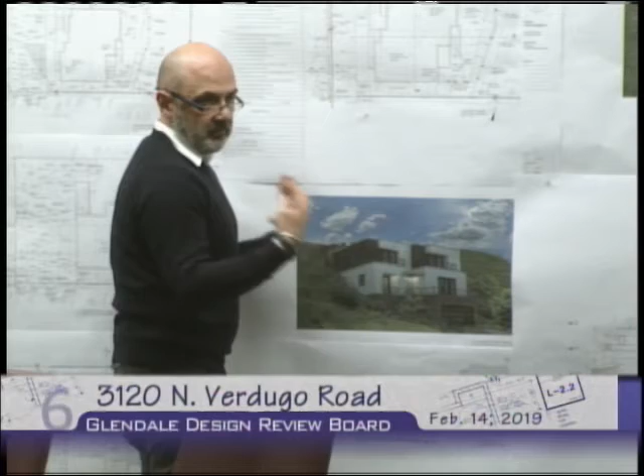This is the only thing that is kind of interesting - pulling this back so it carves into a nice softer opening there, or creating this so it wraps around with some windows or something there. It just feels a little bit more like a commercial office building look, and brings some residential flavor to this, and maybe on the other side, when you have all these solid walls here, maybe some openings or something.

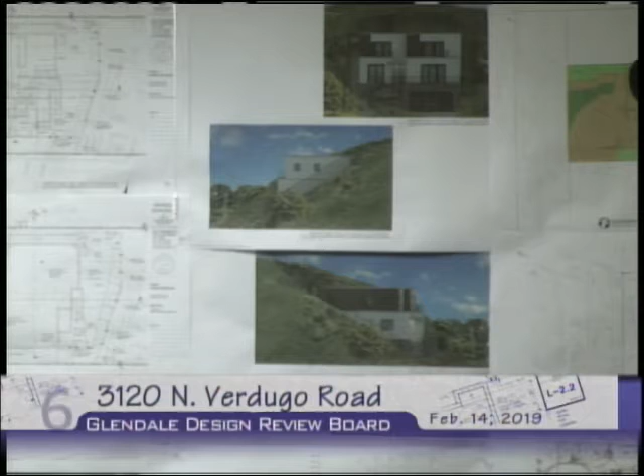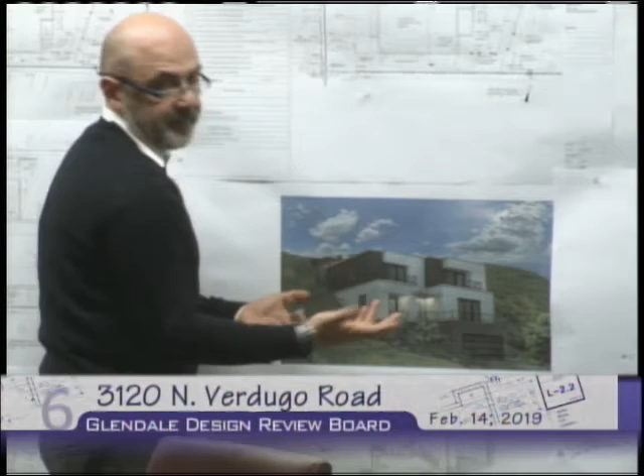I don't know, somehow this three-story building needs to soften up a little bit, and I don't know if it's just materials or these boxes that are coming out, this thing is pushed in. Maybe the window comes out forward, or we could soften that corner with a recessed section, panels that wrap the corner treated with the same kind of wood siding or something like that. I think a little less stucco sticking out of the hill would help, more of a residential flavor with some softer materials, and something that enhances the horizontality maybe, especially at that second, middle level. Yeah, probably in that sense.

It is going to be sticking out. It's literally in front where the garage is on the adjacent property, and it's a split building. The one in the upper, it's a two-level building, and it's visible, with the sides going right next to the garage.

I don't even have a good idea of the context of the adjacent, like that 6-foot section that's going to be left between the garage and the other garage, and how that's actually going to be dealt with. There's a lot of those kinds of questions, and hopefully by softening the building it will be a better view. I think staff started touching on that with their conditions.

I think it's a good direction. I think it needs to be taken a lot further, just material-wise, but I think it just needs to really feel like a house rather than more of a commercial building.

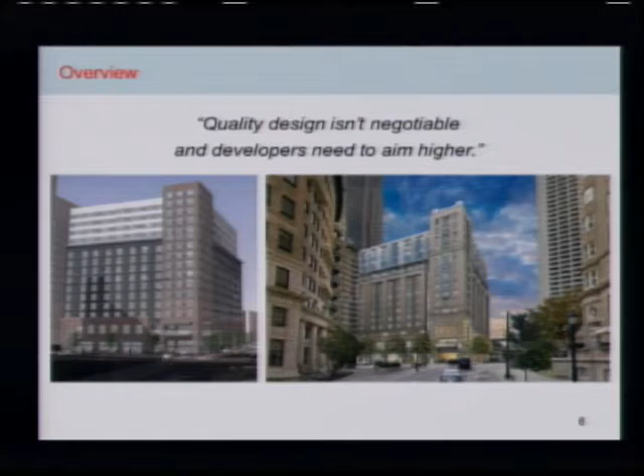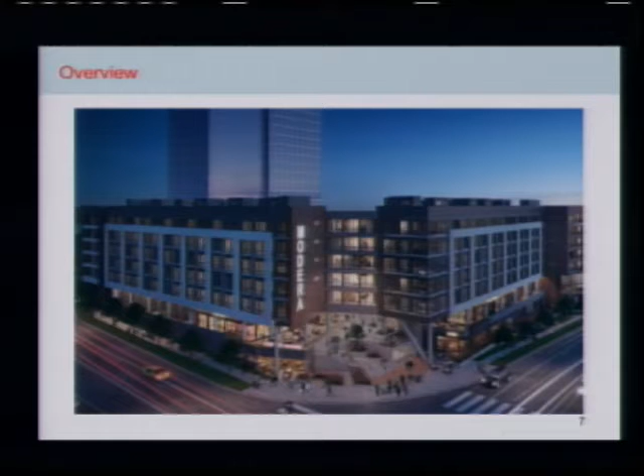Another project that we have looked at is the Modera Prominence, a very similar name to the Modera here in Glendale. Same name, same developer, similar density, similar size, similar requirements. Yet this project, located in Buckhead of Atlanta, was able to obtain public open space at that corner, and if you go to the other corner, same thing. They were able to achieve large open public space.

The reason we bring this up is because as we looked around at other cities, this same developer has two more projects in this city by the same name, and they were able to achieve high rises, elegant, graceful, tall buildings along with open space. So what we realized is that many of these other cities are asking and requiring improved standards and design quality and open space, and they're obtaining it.

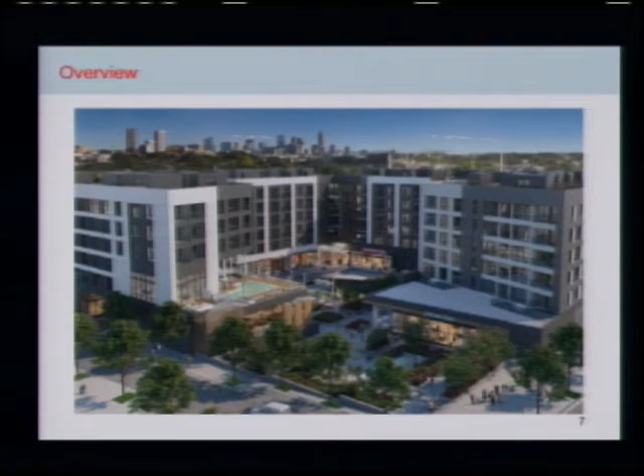That's the approach we took to the updates to the DSP, to be intentional and deliberate. We understood what the community wanted to see, what council wanted to see, and we explicitly state that as part of the downtown specific plan.

As we go through some of these next slides, you'll see that we've really blown up these chapters, we've added a lot. This is not to create a long, difficult process for a designer or developer. We're not trying to create identical results in every single project. What we're really trying to do is bring consistency to our applicants, designers, and developers, so they know what to expect when they come in.

A lot of the feedback we've heard is that designers may receive input that isn't necessarily clear, and that's not necessarily the fault of those giving the feedback. It's because our standards don't explicitly state what it is that we want. It's also meant to assist staff and council.

As we move past the DSP, if we can apply these standards to other neighborhoods, other districts, other types of design, to our boards, commissions, and council, then when they're reviewing projects, they'll have measurable criteria to evaluate them against.

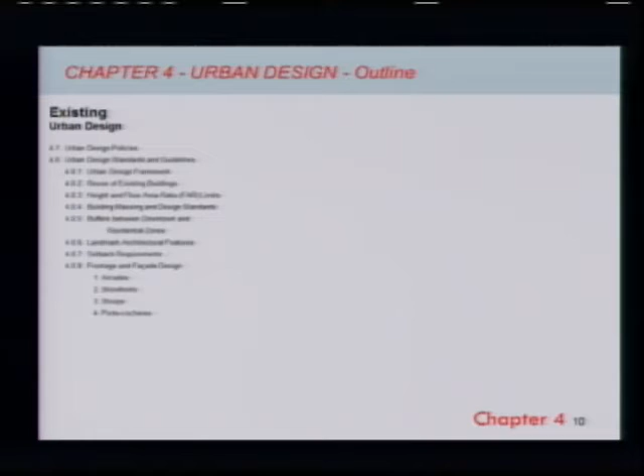The way this is structured, it begins with 4.1 site planning, dealing with large-scale elements that influence the overall form. That includes existing uses on sites, the overall massing envelope from height and FAR to setbacks and open space. It really shapes how that building can be organized on the site.

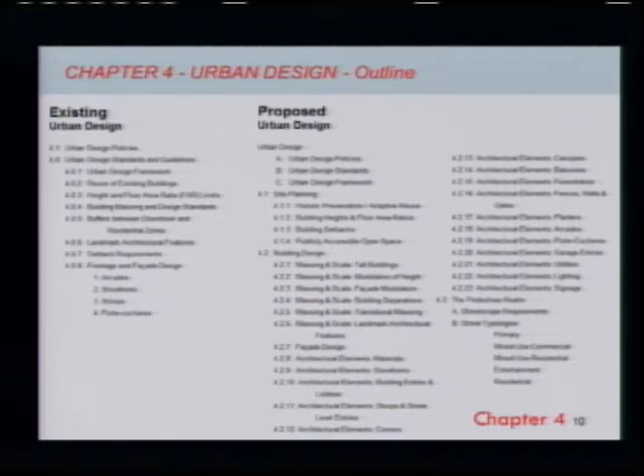As we move through this, it drills down into detail, starting with overall roof lines and modulation, eventually getting to information regarding signage and utilities and how that's located, to create a cohesive design that fosters a good pedestrian environment and public realm. This is the existing height and FAR chart in the DSP.

What we're proposing is to remove the height and stories requirement, primarily because the height of the buildings does not align with the number of stories required. In some cases we have a 185-foot tall height allowance, but only 12 stories can fit in. We all know that mostly in a residential building we're not going to see 14 to 16-foot floor-to-ceiling heights.

We did that because we wanted to create more flexibility to obtain open space and improve sidewalks. Towards the end of this, we'll run through a diagram on how that influences what happens at the public realm and how we can distribute that displaced development throughout the building.

We also looked at two areas to raise the height to 185 feet. Currently, it's kind of a Bermuda Triangle between about 85 feet and 100 to 200 feet, where developers just won't build. The return's just not there. You're switching construction types, changing materials, changing a lot of things, and until you can get that building tall enough, it doesn't make sense to build at that height. So we've actually recommended bringing that up to 185 feet, similar to the Broadway Center A area.

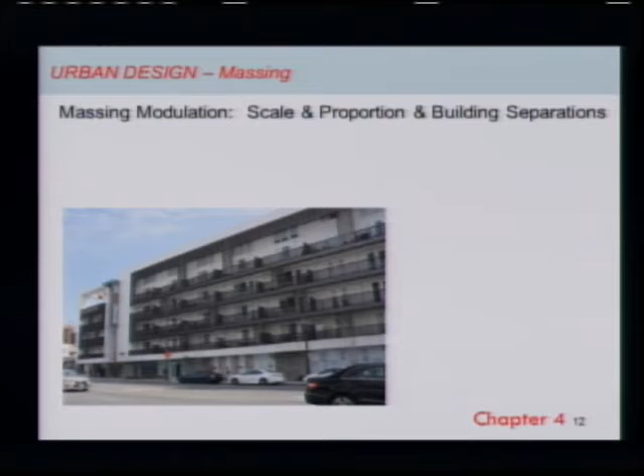So currently, this is one of the recent developments in downtown Glendale, and some of the critique we heard is, again, large, boxy buildings, a monotone material palette. It's missing the kind of nuance that creates an interesting skyline and a more engaging streetscape.

I think we all kind of know that this is something comfortable to the eye. This is a basic design principle, especially for mid-rises and high-rise buildings. Council responded very well to this.

What we came to understand from council and the community is that's one of the reasons everyone loves Brand—you have this constant change. Every 20, 30, 40 feet, the facades are changing, the buildings are changing. There's no reason we can't pursue those same principles with new development and new projects.

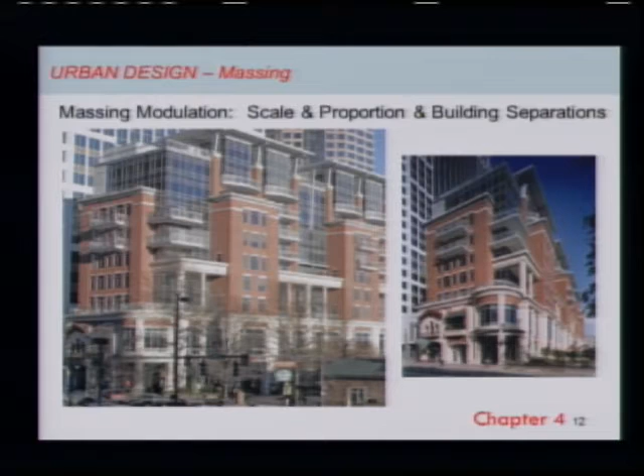So as we start at the top of the massing, we heard that the roof line height was lacking interest. You could see in that prior example the roof line was a pretty static datum line. A lot of projects follow that, the idea that we've given the city a haircut at 55 feet, and nothing really goes above that to create visual interest.

So what we've done as part of this is create some standards and requirements, and most importantly, some options. Again, we're not trying to engineer identical results, but we can create a series of options new projects can pursue to create more interest.

One option is that we require a minimum 10-foot change every 150 feet along any roof line facing a primary street or street frontage, so that we break up this massing and it feels like multiple buildings. Some of these buildings are 200-300 feet long, and we need to create a scale that relates to the human environment. You'll see how that translates to the facades as well.

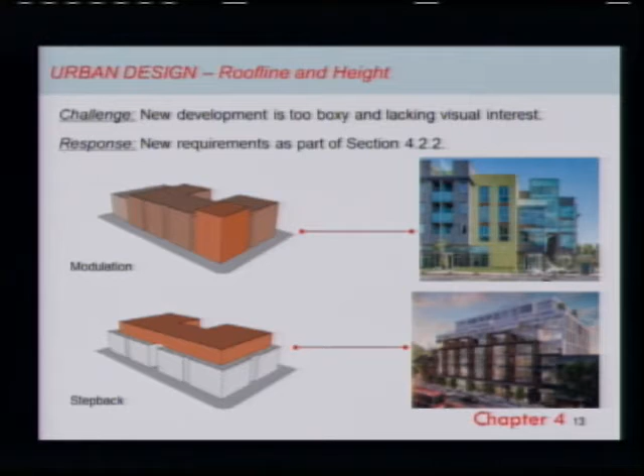Another option is to step the building back. We heard a lot of critique on Central that it was becoming a canyon, and that above a certain height we could have these floor plates step back so it lets that breathe, again relating to the human scale.

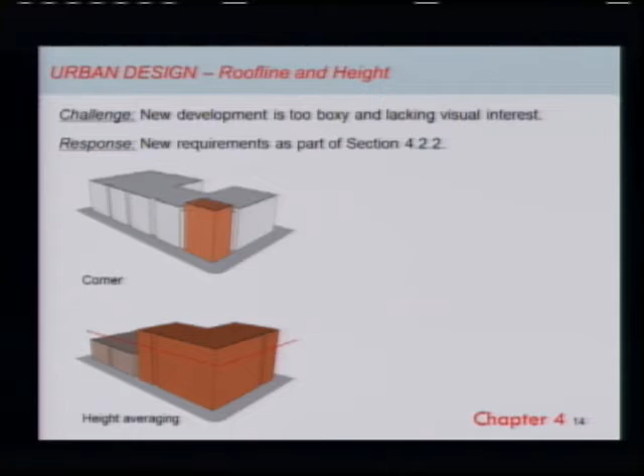Another option was a corner feature. We heard positive feedback from some newer buildings that incorporated this, and how it created a gateway and a sense of prominence to the building, but also variation in the roof line.

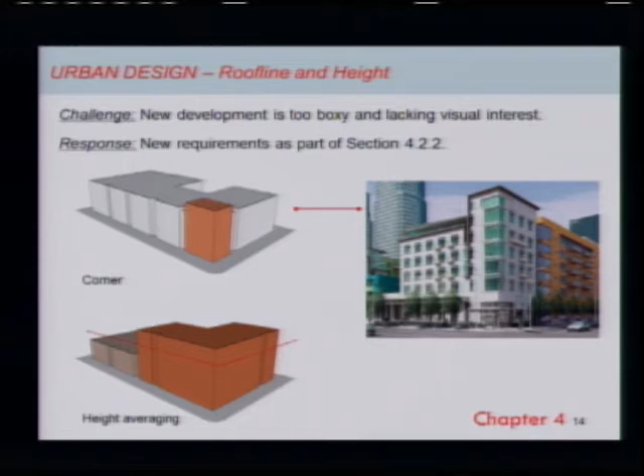And then the last is looking at height averaging. This may be most applicable in transition zones, where we would allow the displacement of some building mass closer to the street, away from the residential transition area, and allow that to exceed the maximum height, provided the entire massing averaged to the existing maximum height. This was, again, to create two distinct forms. It could assist in creating a better transition to the multifamily neighborhoods to the west and east, but also just create more variation in the skyline.

What we also looked at is how that affects the vertical, not just the horizontal roof line, but some of the facades that we have are long expanses of storefront glazing, aluminum storefront glazing, with little variation in the facade. So we're requiring major and minor modulations every 100 feet and 50 feet. Inside your document, it lists the specific depths and widths, the minimums we're looking for. But to follow that standard, we need that variation as one is moving down the street, that constant change, that visual interest as you move along.

So major every 100 and minor every 50 feet? Correct. And there are some other features we won't go through everything tonight because it's just so much information, you can see in the table of contents. But we have information regarding setbacks at the building adjacent zone on the street frontage and how that can align, so we're not creating situations too difficult to achieve, but ones that can align with other things we'd like to see as part of the streetscape or building design.

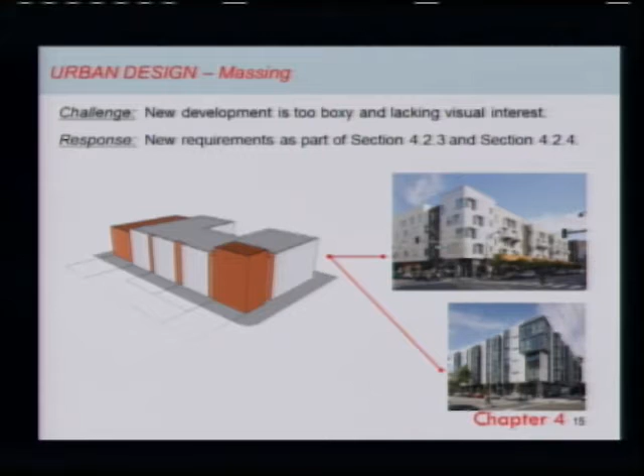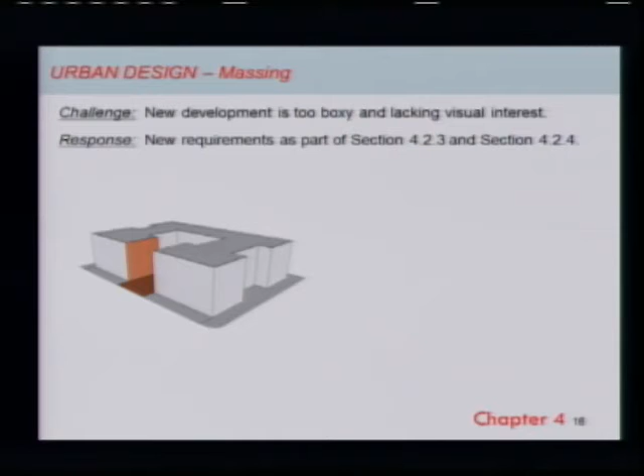And then building separation. As I mentioned before, some of these buildings span up to 300 feet along the blocks, and in many cases we do have a separation in the center, about 40 feet wide. The issue is that it never comes down to grade, and that same facade continues on for the full 300 feet. So it may look good from far away, but if you're a pedestrian, you're still walking along that same repetitive wall. So in this case, we want to see that separation brought down to grade, we want to see that building open up. It feels like two distinct buildings, and it gives you a reprieve from that constant repetition we see in those long blocks.

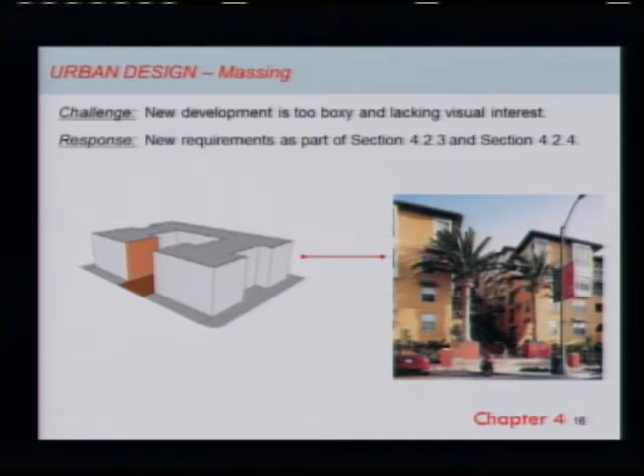Materials were a very major point to not only the community but council as well. There was a lot of discussion around the monotone color of materials, the fact that EIFS has been used as the predominant material. We know that's going to be used, we're in an earthquake zone, it's an efficient material to use, but it doesn't need to be the only material, it doesn't need to only be in one color, and it also doesn't need to be used at the street level.

Again, we're trying to create a human scale along the pedestrian realm, and these lower portions of the building, up to 20 feet, need to represent that. Rather than having these 8-foot by 4-foot long large panels, we want materials that actually speak to the human scale. That may be masonry, it could be wood, aluminum panels, or still concrete panels, provided they're scored appropriately. What we've asked for from applicants is not a list of specific materials to use, but rather to demonstrate to us that the material you are using can achieve a human scale.

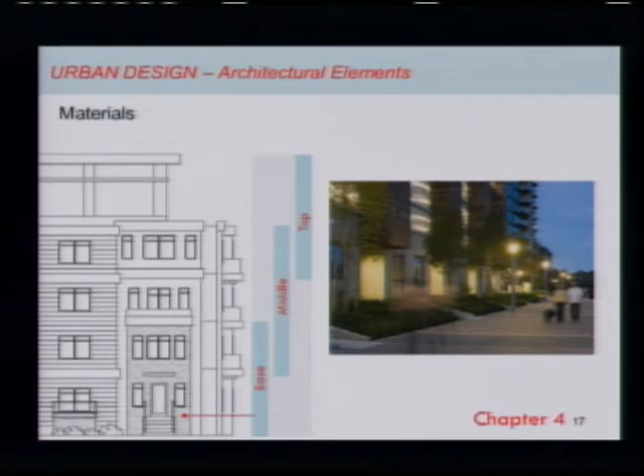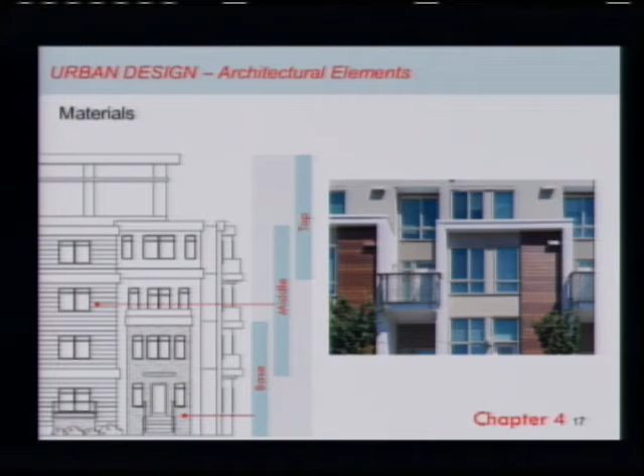As we move up the building, it's still keeping some of those human scale elements, but this is where it may be appropriate for large panels, where EIFS or metal panels may come into play. And even moving up further, are there opportunities to incorporate more glazing? Again, lightening that mass, especially in instances where we may have a building step back, so the building doesn't have that imposing nature.

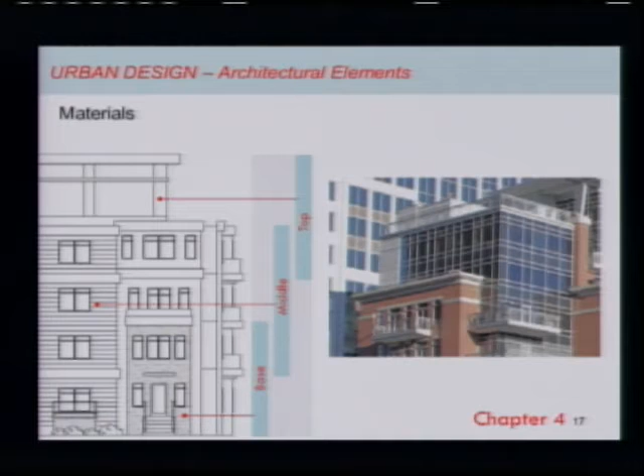Just because you have that picture up there, what are we doing? I think I've seen something in the packet where the overhangs, before you could overhang over the property line, that's gone? Correct, you will not be allowed to overhang over the property line. In fact, we'll cover it shortly, but we have expanded that entire pedestrian realm as well, and have created some requirements on where you can and can't overhang, essentially.

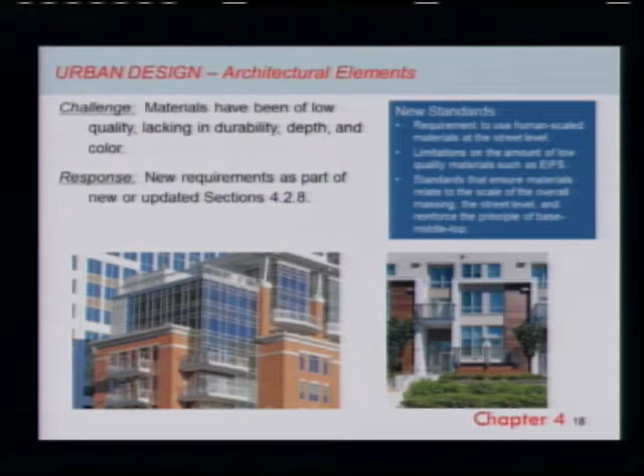So again, as I mentioned, we set a number of standards on what kind of materials should or could be used, really trying to increase the scale as you move up the building rather than at street level, so we're creating a friendly pedestrian environment, one a human can feel engaged in as they walk past. This also affects frontages. We've seen a lot of the same aluminum storefront frontages that are pretty standard, but the reason many people like variety is that as you walk down, you have different storefronts. Some swing out, some swing open, some are just wide open, and the activity spills out. The idea is that you can blend that private use with the public realm and it becomes more engaging, and we're trying to obtain that on other streets as well.

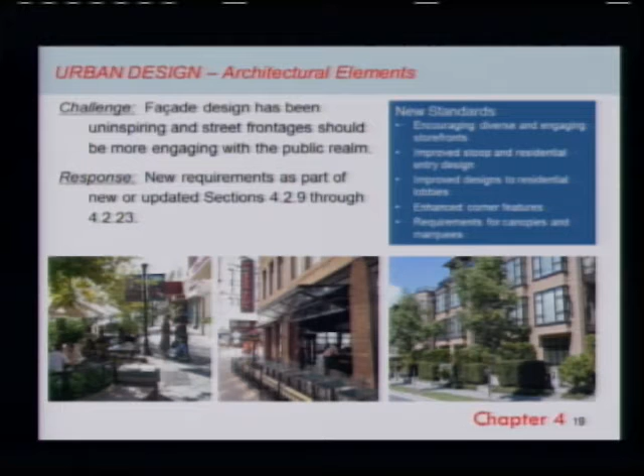So, if I may, I'm collecting all my thoughts. What I'm hearing is Brand is a great example, and that's what we want to do. But then at the other end, we're talking about setbacks and open spaces, and then about the massing and how it feels as you're driving down rather than the pedestrian. So what are we trying to achieve? I'm kind of lost in all these different thoughts being presented right now.

Because if we want to do like Brand, then we shouldn't have any setback, we shouldn't have any open space. It should be more pedestrian activity and scale to humans, just like Brand. Whereas if it goes higher, then yes, it's set back, so as you're driving down you feel much better rather than this monotone architecture. But then if we want to bring in open space, then it's not Brand, actually it's more the northern part of Brand. But that's more of an activity for the patrons of the building rather than pedestrians walking through, because people aren't going to walk into someone's property and enjoy it. We're not creating parks there. So that's what I'm trying to understand. Where are we going with all these different ideas?

So the focus is entirely on pedestrians. Even when we say canyon-like effect, that is how it feels in terms of the pedestrian - the fact that the buildings essentially begin to loom, and you have this continuous facade, this continuous datum line, so you never have a reprieve from feeling like you're in a canyon.

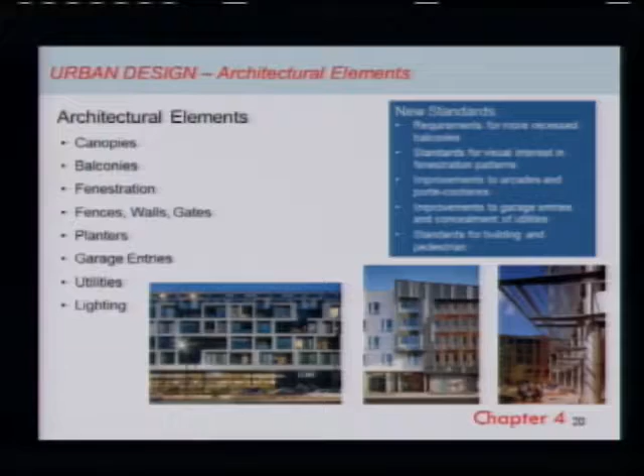Planters were another issue—in a lot of projects they planned landscaping at grade, then came back and added an above-grade planting box, often saying 'we didn't know our parking garage would be there,' even though we all know where that boundary is. Later this year we'll bring improvements to the submittal packets so we obtain this information early, so applicants can't say 'we didn't know.' We're fleshing that out early so we can be intentional and deliberate.

We're also locating garage entries on alleys wherever feasible to minimize pedestrian and car conflicts, and integrating utilities and lighting into the building so we don't have as many free-floating standpipes on the sidewalk. I'm going to turn this over to Velia now.

She's going to go through the public realm, which includes the sidewalk and open space requirements. Thank you.

As part of the urban design chapter overhaul, we really took a focus on the public realm, meaning the area between the curb and the building wall. This is in response to comments from City Council and the public about uninviting, imposing sidewalk experiences, especially along Central.

So there's a focus on extending that public realm, including wider sidewalks and parkways, requiring street trees at closer proximity, having lighting fixtures along street frontages at the pedestrian level, taking a look at pedestrian-oriented signage—whether projecting signs or wall signs—and re-examining intersections, crosswalk paving and striping, and expanded sidewalk bulbs.

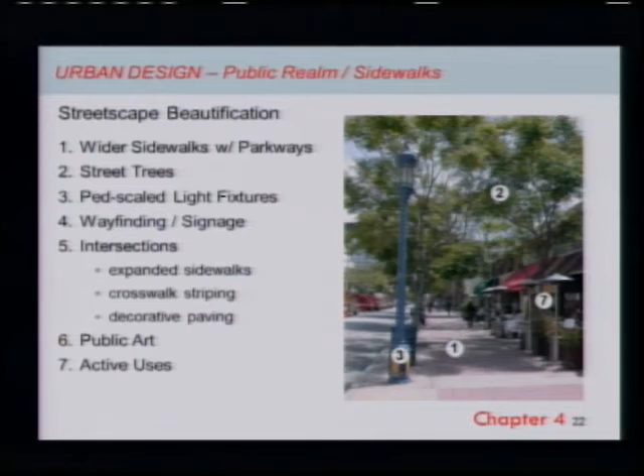We're also looking at public art, and how to incorporate it within the public realm so it's truly public art. We're examining uses along the pedestrian realm, such as activated uses like retail and outdoor restaurants, plus streetscape beautification like decorative paving and crosswalks.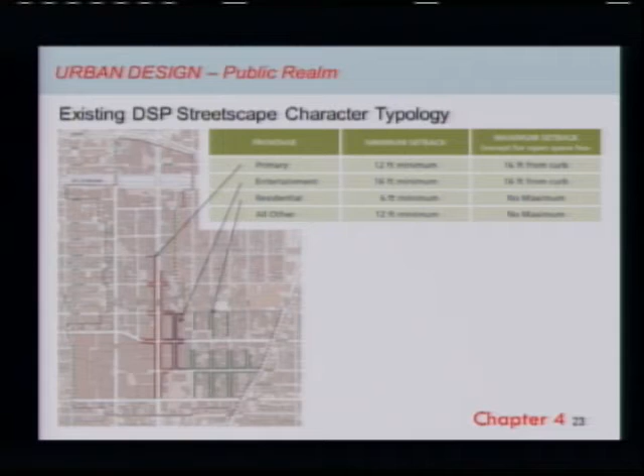Prior to that, it was our very first mixed-use district—commercial mixed-use and residential mixed-use back in the early 2000s. So those are the 3 streets called out in today's DSP, but it neglected to identify the rest of the streets. So we've introduced 2 additional street typologies.

One is mixed-use commercial streets, with its own development standards and criteria, primarily along Central Avenue and extending to parts of Colorado as well. The other is mixed-use residential streets—these connect Brand with Central Avenue as east-west connectors, and would be much more residentially oriented.

Not to say that you can't have commercial on these streets - those are permitted uses - but the primary emphasis would be more of residential stoops and lobbies and a more intimate type of scale and experience on those side streets.

So Vilya, we're talking about the same zones but with different guidelines, right? Yes and no. We don't have a map right now of the various districts. The districts themselves within the DSP, there are 11 of them, those are going to remain as is. So there are no changes to the actual districts in the downtown specific plan, but we've overlaid these street typologies on these districts. So the street typologies would essentially be standards and criteria for how do we address the street activity at that location.

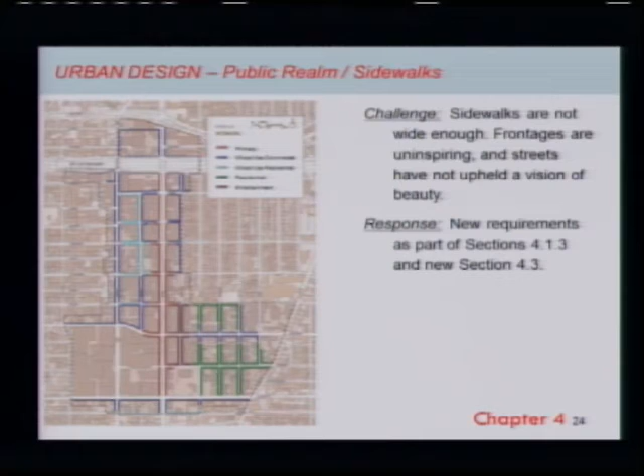The example before you on the screen would be essentially the distinctions between the different street typologies. So each street typology has its own total setback width - there's a wider setback for commercial mixed use, there's a narrower setback for the residential streets. But there is essentially a standard for the parkway width, the sidewalk, so there'd be wider sidewalks along commercial mixed use streets, and then also what's called the building adjacent zone.

In the building adjacent zone, you would be allowed to have either landscaping or, if applicable such as a commercial zone, street furniture, outdoor dining and seating for adjacent restaurant uses and whatnot. So each street, depending on its street typology, would have a different overall pedestrian realm and those corresponding guidelines.

So later on when we have the final version, you will identify the street and all the different setbacks that go with each one? These are actually in the preliminary draft that you received as part of your packet, so these streets are now identified within the draft. So these numbers are going to stay as proposed? These are the numbers that are currently proposed by staff, and again, if you have comments, this is the time and place to hear those comments.

It's an assumption made so that these projects are going to be broad, large development projects, correct? What happens to these smaller, narrower projects that have lots that are 50 feet wide and they want to develop this? How does that work?

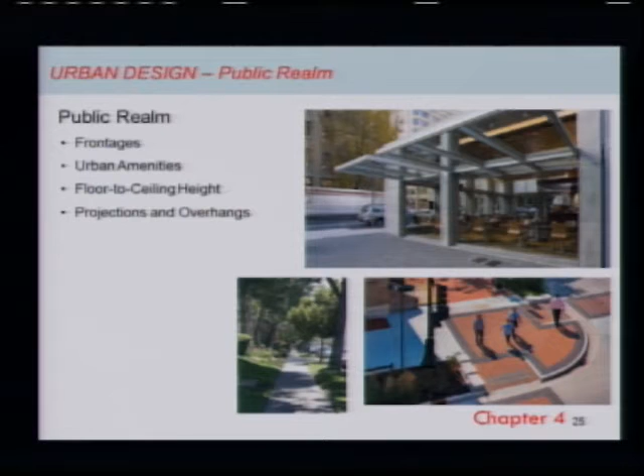We would also determine what the minimum and maximum floor to ceiling height would be, as well as projections and overhangs. And as noted, Chairman Bentley, there was a question: can the buildings project over the sidewalk? In this case, the downtown specific plan, the draft plan, prohibits any type of projections over the required setback or the new sidewalk level.

So by code right now, the building code is prohibiting it. Previously, projections were allowed and balconies were allowed to project into the public right of way over the front property line. That's no longer permitted by the Public Works or Building Department.

And in this case, based on the extended public right-of-way and sidewalk width, the building would have to come back from that as well. But you can project over the building adjacent zone. Following the mouse here, above 20 feet you'd be able to project out to the back of the sidewalk, essentially.

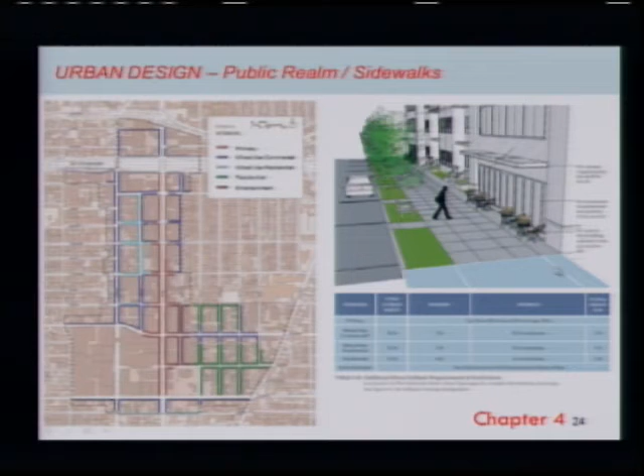So in terms of—which is a great segue to the open space chapter—this would be Chapter 5, which was revamped as well.

On the screen you see the outline of the existing Chapter 5, which covers open space, actually identified as parks and open space. So there was much more an emphasis on parks and the network of space.

We have not lost that network focus, but we've also introduced more stringent requirements for the actual publicly accessible open space on projects. This is in response to council direction and comments we've heard from the public as well. We've had these projects before where the publicly accessible open space—well, the area is there, but it's not really attractive, it's not usable, it's not substantial. So how do we address that?

Staff has presented an expanded Chapter 5, which has criteria for dimensions, accessibility, materials, landscaping, and hardscape. These are actually standardized criteria, whereas before there were a lot of guidelines in the DSP. This document really focuses on enforceable standards that give clarity to developers, give clarity to staff, and ultimately result in meaningful open space areas.

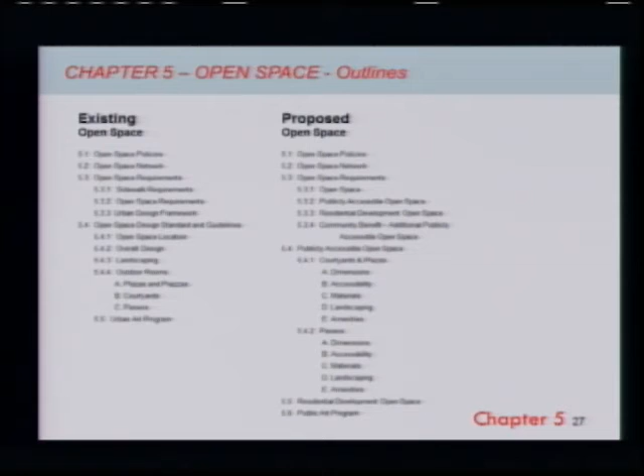So no longer will a 6-inch by 300 feet count. No, we will not be having any more 2 feet by 150 count as your publicly accessible open space. That's a good point, though—it has been used in the past. No longer.

The open space in this regard is going to have to be contiguous, in a meaningful, larger space that's actually adjacent to the public right-of-way. So you really do get a chance to feel this from the pedestrian level. It's not going to be elevated on another podium level that's not available visually or physically from the public. So there are criteria in Chapter 5 to address those.

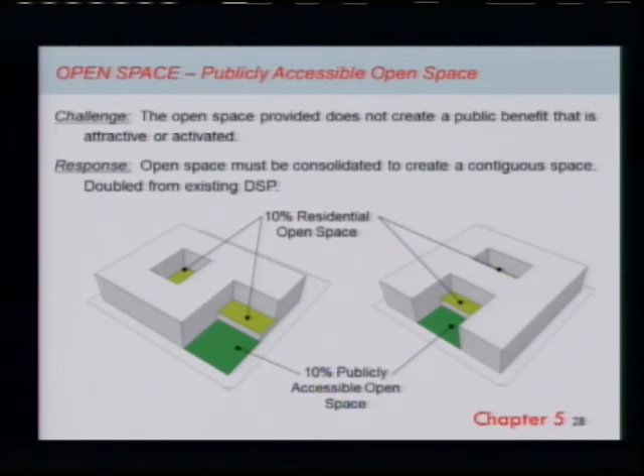There's also been an increase in the amount of publicly accessible open space. We've essentially doubled the required publicly accessible open space for most projects. Again, the requirement depends on which district you're located in and the size of your project—the larger the project, the more publicly accessible open space.

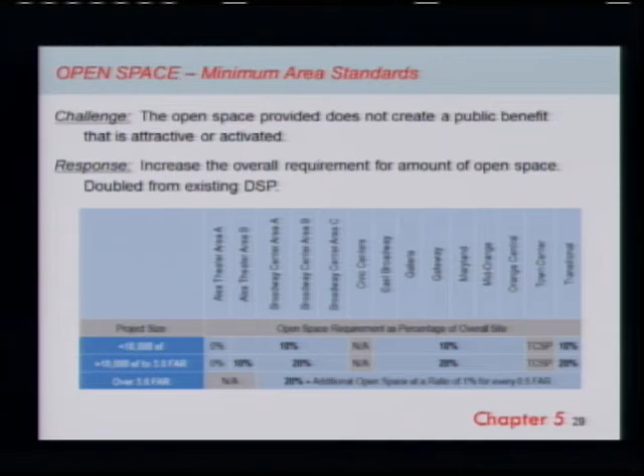So let me ask you a question, if I may. Let's say you have a property—7,500 square feet, 50 by 150 on Central or something like that, or 10,000 square feet, whatever it is—and 10% of that, assuming it's in that smaller portion, less than 10,000. So that means they have to provide 1,000 square feet of open space in that project? Is that what is being said?

If the street frontage width is 50 feet or less, no, they do not. If they're larger, yes. We did establish that criteria based on the width of the site facing the street frontage, because it doesn't make sense if it's an extremely narrow lot.

So if it's wider, say 100 by 100—correct, they would have to provide 1,000 square feet of open space along the street side, so people can use that as a setback, they can do whatever they want. So if they push the building back 10 feet, theoretically they get their 1,000 square feet that they need if it's a 10,000 square foot lot.

I think 10 foot is too small. I understand, I just don't want the public, and designers looking at this, to find a way, like previous projects, to manipulate the codes and bring something that just barely meets the code. It has to be a theoretical minimum, so it has to be substantial, usable space, correct?

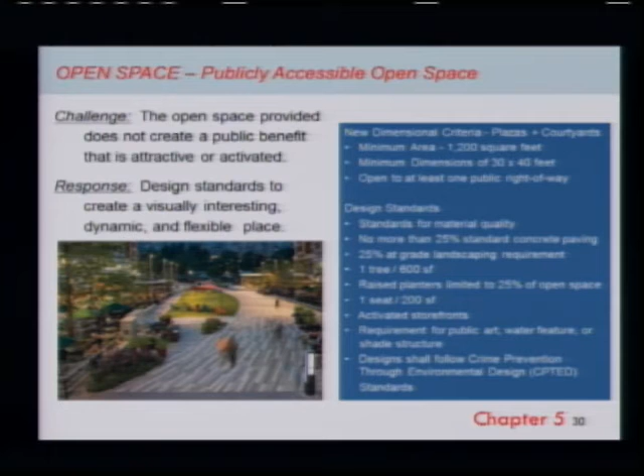So, if I may, just a comment, my thought as a board member. I appreciate the specific sizes as far as one tree for every 600, and 25% of open or landscape area, or 10% of open area.

But when we give a specific size of rectangular or square open space, aren't we kind of limiting the creativity of designers, landscape architects, who maybe want an organic flow of elements that come in and go out, and parts of it become more creative, and it works with their design? Then it's like, no, you don't have a 30 by 40, it's not square, or it's not rectangular. So is that a limitation we want? The 30 by 40 is essentially somewhat of a rectangle to meet the minimum area.

We've had in the past, and this is the problem we've had with the current DSP, a 20-foot width length type of criteria. Unfortunately, individuals took advantage of that. They provided a 20 by 20 foot area they considered a plaza, which is 400 square feet, and then utilized the rest of it in an elongated setback.

So by requiring from the beginning a larger, more meaningful, publicly accessible open space, that is to essentially address the direction we are trying to go, to create more meaningful, publicly accessible open spaces along the downtown streetscapes, and not just token setbacks. That 30 by 40, at this point in time, is the type of standard we've proposed to make it more meaningful.

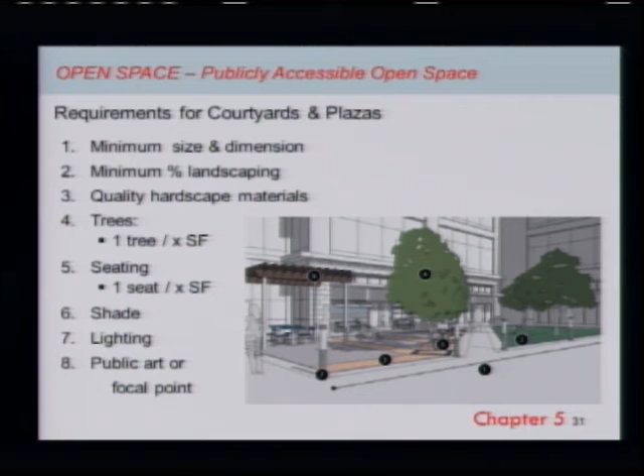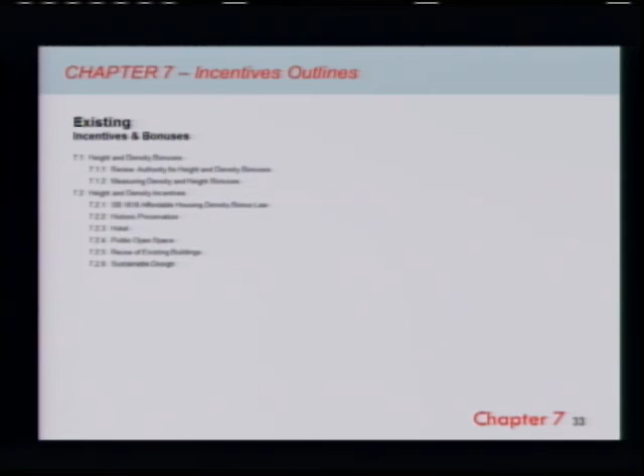Which brings us to the last chapter under tonight's discussion, the community benefits chapter. The previous chapter was called incentives and bonuses, and it focused on development bonuses granted in exchange for providing things like additional publicly accessible open space, and that bonus and incentive system was found lacking. We have an outline of the existing chapter for incentives and bonuses, and we've somewhat expanded it, including some previous elements in terms of preferred uses.

We've also introduced a tiered bonus system. Certain uses, as previously in our DSP incentives and bonuses chapter, would still be granted the full maximum development potential. Those include affordable housing, historic preservation, hotel uses, and reuse of buildings. So for those preferred priority uses downtown, they would still be able to obtain the maximum development potential.

But for new residential and commercial projects, there is a new tiered system, and I would like to have Bradley turn this over to discuss this.

So just to understand the previous slide, these uses can get the maximum without going through the tier system, basically? Without the tiered system, yes. These are simply preferred priority uses that receive the full development maximum potential. This would be for the floor area ratio and for the overall building height.

Okay, so SB 1818, I guess we have no choice, that's given. But the historic—fine. And the other uses like hotel and reuse, who came up with that? Is that what staff is proposing?

That is in the current downtown specific plan. Hotels have been identified as a priority by economic development to attract visitors, those that may patronize our businesses and restaurants. We do maintain that, and that's not to say they are excluded from all the standards we just went through—the open space standards still apply.

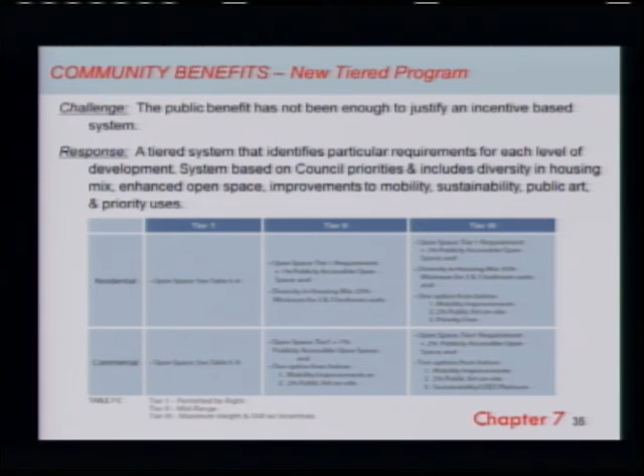Public art on site, rather than them just paying into a fund and we let that money sit until we're able to actually achieve some art installations, we would have them produce it on site, create it on site. What that really does is offer an opportunity to have that integrated into the design rather than necessarily plop art installations that tend to fade into the background. We also have priority uses that they could pursue as well to help fulfill that community benefit.

Going back to that diversity and housing mix, one of the things we looked at, if we're really trying to attract diverse households, we want households that have children, households that are multi-generational, maybe their grandmother lives with them, maybe it's another relative, is that these units also need to have some certain standards applied to them.

Vancouver, BC has been extremely successful in attracting families to live in their urban core and in their kind of TOD developments. That's because they have this minimum requirement and they also have these design standards that apply, that these units that participate in this community benefit program need to be located at a certain place in the building, because in the case of children and families, they like to live close to one another.

They need, rather than just a bunch of concrete paved courtyards in these buildings, they need playgrounds in there. Maybe they can convert that business center in the apartment buildings that no one ever seems to use at any point in time and turn that into a homework room for children.

So a number of standards that we've kind of mapped out based on their model and several other cities that have been proven to be successful in how you could create housing for those household types also makes them want to stay. Our downtown is not just a port of entry for families that may be coming into Glendale, but again, it becomes a neighborhood and they want to live there.

There are other things that we identify with council that we as a city, in addition to the DSP, need to be doing to encourage that, to encourage them to stay. Some of those are just how we convey our resources to households.

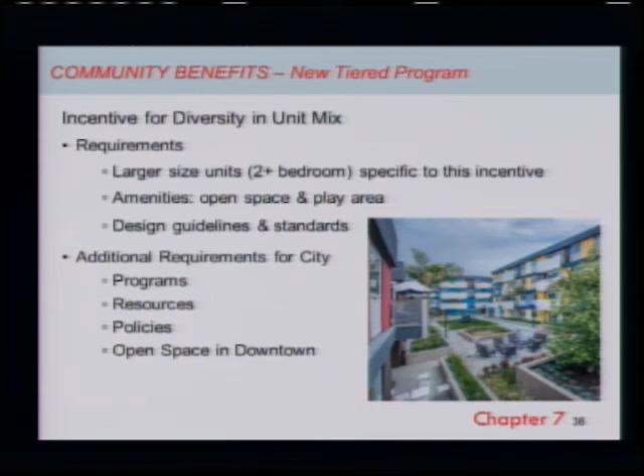In Philadelphia, they have a website dedicated specifically for families living downtown. This is where your daycare centers are. This is where your grocery stores are. There are things that we could be doing to help promote that as well. But that's outside of the DSP and other things we would pursue.

So lastly, what we did is we wanted to test all of this. As a recovering architect who used to cheat the system every now and then as well, I figured let's see how well this system works.

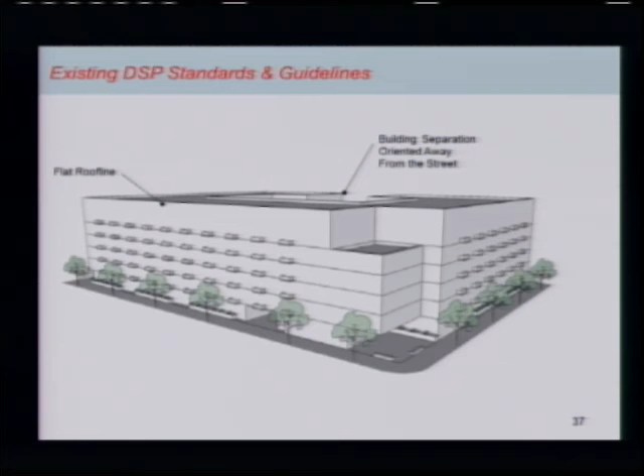They have flat roof lines. The building separation may be located on the alley side, or even if it's on the street side, it doesn't come down to grade, so it still feels like a large mass for a pedestrian.

The sidewalks, we have heard, are too narrow. The balcony projections, some of them hang over, or they just have that tacked-on kind of feeling to the building. The continuous massing and facade, where's the modulation, where's the undulation that occurs? The garage entry creates conflicts with pedestrians.

In many cases, we have some examples that were great. They masked their utilities, decorated the inside of the walls with maybe art installations or good materials. Others just left the guts exposed. There are these wide mouth openings in the side of buildings that create conflict with pedestrians, and they're also just not aesthetically pleasing.

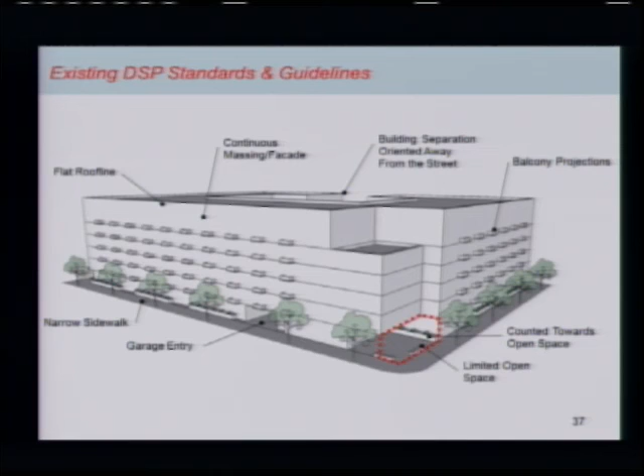As we discussed before, these little narrow planters and these little spaces that are concrete paved with maybe a concrete bench have been counting towards open space. So we took our standards and we were essentially able to develop this.

The roofline modulation requirement—that every 150 feet there needs to be some sort of change—combined with building separation, something that actually comes down to grade, can also have the publicly accessible open space located in it, with wider sidewalks so the buildings step back more.

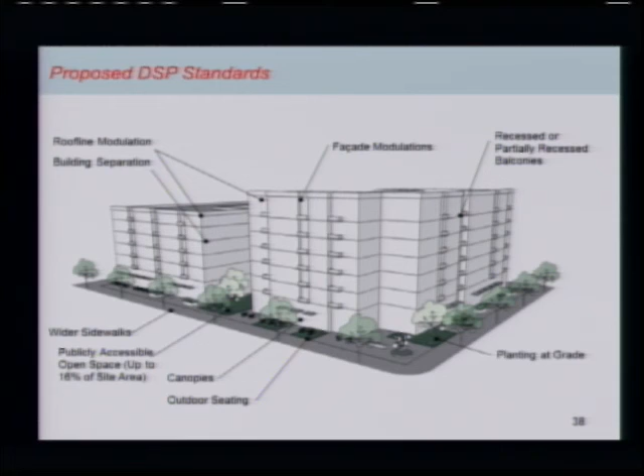Right when I bring that home, we'll actually show that there—a lot of elements in here we were trying to fit in. But yes, this building is the exact same height, it's the exact same FAR. In fact, the left side portion is one story lower. This goes to the fact that if we remove that stories requirement from this, I can fit more in there.

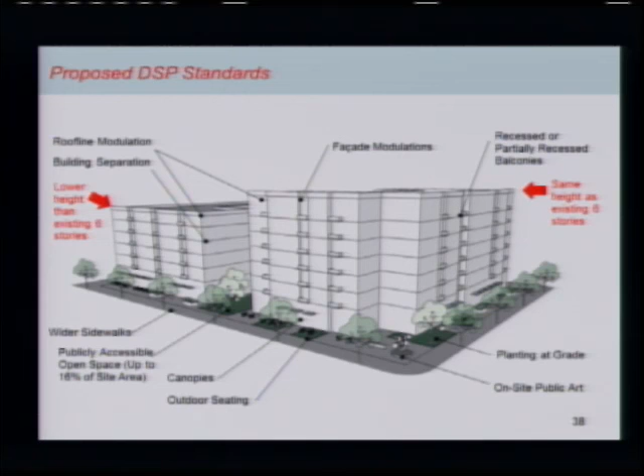What we were seeing with a lot of these developments were what we were calling the mezzanine levels at the top, and really that was just a loft space. They could have fit a whole other floor of units in there, and we could have claimed some of that ground space back that could have been used for open space or wider sidewalks. So in this case, we were able to maintain that same height—we were just able to slide another story inside.

Going to this diagram here, this is what we were essentially getting. You can see that little notch where we were counting that as open space, and this is how much at-grade space we would be able to obtain, all by sliding that into the middle floors—16.5 or 16% of the open space, the wider sidewalks, the planting at grade, the separation occurring at the street. So as you can see in that perspective, it becomes kind of two distinct massings depending on your approach to the building.

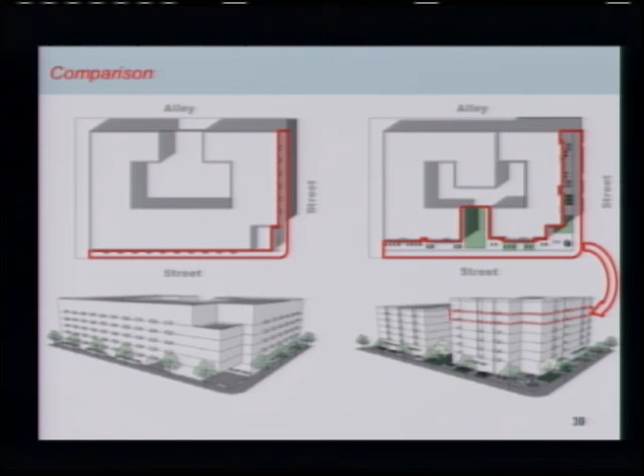And that was really kind of our test: could this work? Can we still get you the same development potential? Can we still get all the things that council and the community have identified as priorities? You know, that's a lot of information.

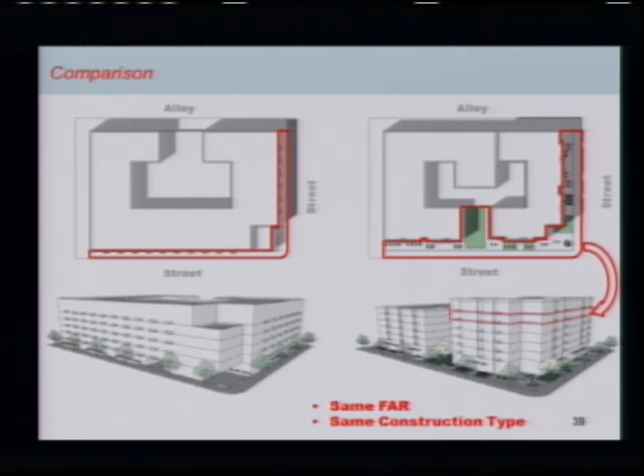So can we go back to—I want to kind of compare that concept to the two projects that you started your presentation with, on page 3 or page 6 and page 4, which had to do with the massing. So if somebody—if we are trying to tell people that in order for them to meet this requirement, they need to provide setback, and by giving us the setback, will allow them to go higher to compensate for the massing or the FAR loss that they would have on the ground level.

My concern is the scale and the feel of pedestrian, because I think our goal needs to be for pedestrian, right? The feel that you create with a minimal setback by creating a 7-story building or an 8-story building or whatever the case may be, in order for that to feel comfortable for people to walk by, the setback is going to be critical, right?

But then comparing to the two projects, the hotel—and I don't remember what city it was, chapter you started with the massing—Atlanta, it was at Atlanta—by creating an arcade, by creating activities on the ground level and bringing a human scale to that level, how does that compare? I mean, if somebody comes and proposes that, is that going to be acceptable? Or do they have to go with such a proposal whereas they need to push the building in order for them to get the setback?

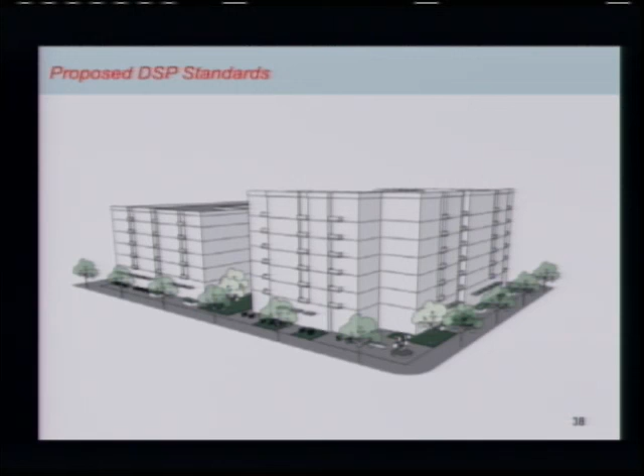So your setback would be extremely substantial, and the open space in return, especially combined with the design standards, would be significant. The references we used for Atlanta, we didn't test those against it. I think what we really wanted to show there is that if we're deliberate and intentional in what we ask for, we can obtain that. Again, we don't want to design the building for them. In that case in Atlanta, they did not redesign that hotel for them. They just said, these are the things that are important to us, and this is what we need from it. So we're really just trying to illustrate that we have the room and the flexibility to ask for improved design.

Thank you. Thank you.

That's it? I think, and last thing, are these projects going to go straight to council, or will they come to the board or any other review body other than the council? As of right now, it will remain with council. We're looking at process improvements, which would actually start around the same time that this would wrap up, so maybe there would be some implications there. We're not quite sure, but we're looking at ways to improve overall process for all DRB applications, regardless of neighborhood or district. I see. Okay, perfect, thank you.

Thank you. Are there any other comments? Does the Design Review Board have any other comments from individual board members? No, thank you. I like the breakdown. I like the clarity. I like the precise numbering. I think the direction it's going takes out the vagueness and uncertain conditions we had before, and I think it helps designers focus more on what the intent is, which overall I think is a great result.